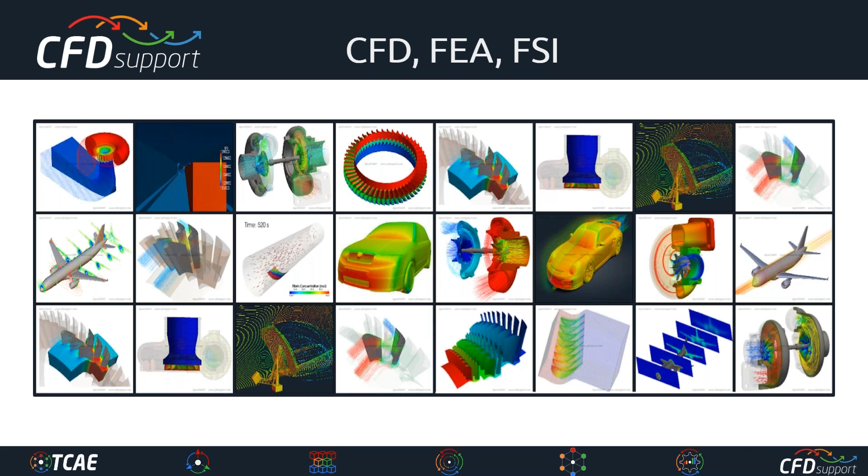Okay, so I'll start with the introduction. CFD Support is the name of our company. The company was founded in 2009 as a technological startup, and we are located in Prague, Czech Republic. Our main business is CAE analysis, simulations, specifically CFD, FEA, and FSI - all these simulations and analysis.

We have a very good, very powerful team who really know what to do, and we are developing software and doing all the stuff around it. Our main business is developing software called TCAE. It's a comprehensive simulation environment, and that's what our webinar will be about.

We have recently released the latest new version, TCAE 20.09, which was really a big shift in what we do, because it's new and there is a lot of new stuff in it.

I guess you know it, but still, TCAE is based on open source - we love open source. It consists of 46 open source packages, and a lot of time and effort has been spent on developing those packages by the open source community. On top of that, we have spent more than 30 man-years of specific development to make it available with a graphical interface, make it robust and usable, and really prove it works. So a lot of work has been spent.

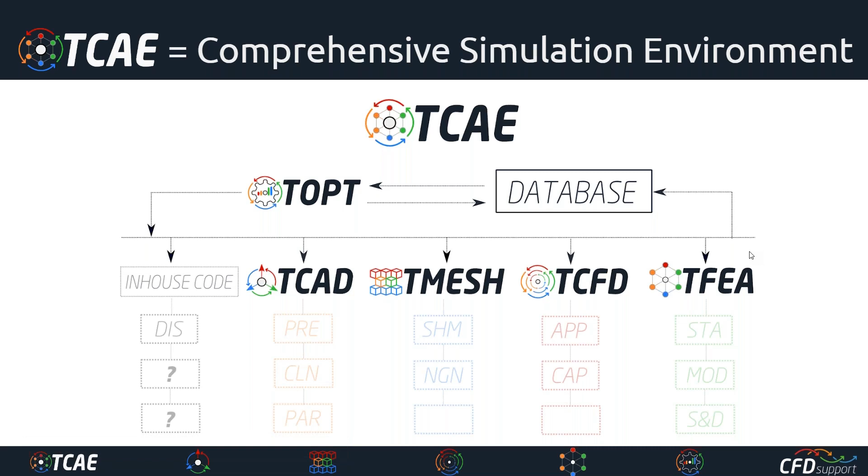TCAE is now a comprehensive simulation environment. It consists of software modules - specific software modules which are in fact standalone software pieces. So they can work either together in a connected workflow, or they can work just like standalone tools inside other workflows. It's very flexible and very much variable in terms of its use.

TCAE has strong integration ability. It was developed from the beginning in a way to fit any existing workflow which already exists. So it can replace, for example, just the CFD part, or it can do just meshing, or both of them, and it can be used in combination with all the possible software pieces available in the market - either open source, commercial codes, or in-house codes. TCAE is always here to be used inside existing workflows.

Okay, there are lots of stuff. I'm not gonna go into too much detail. It's very important that TCAE has a graphical interface, where the user can set everything from scratch, run the simulation, evaluate the results, and save them and get back anytime. So it's very comprehensive in these terms.

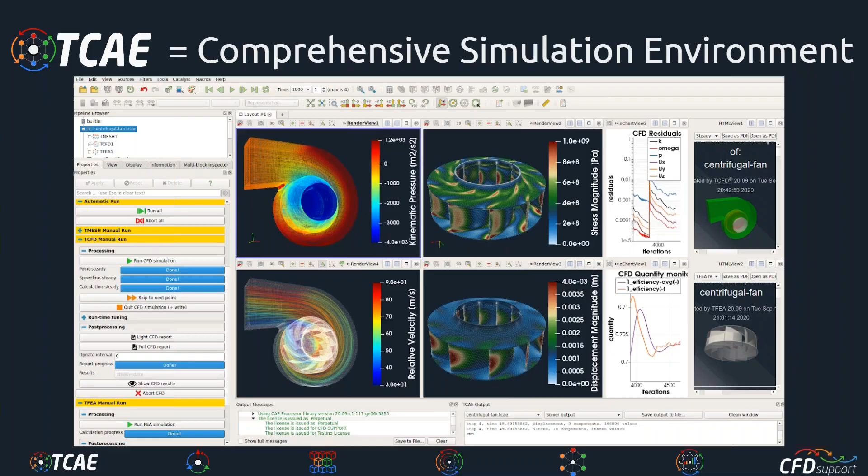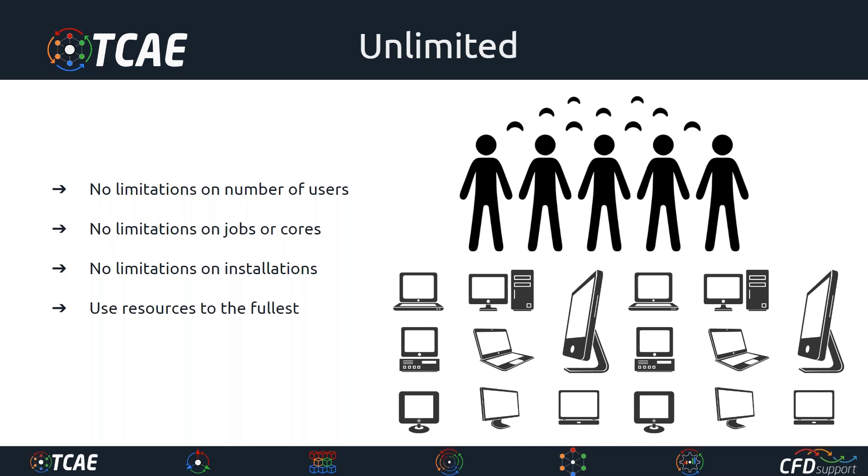TCAE is unlimited, so there is no limitation on the number of users, no limitation on the number of jobs or cores, and no limitations on hardware installations. So its users can use it to the fullest in terms of users, hardware, and everything. This is a big thing in terms of business model.

TCAE is definitely very accurate. We are clearly focused on the accuracy. I would say we are obsessed with accuracy.

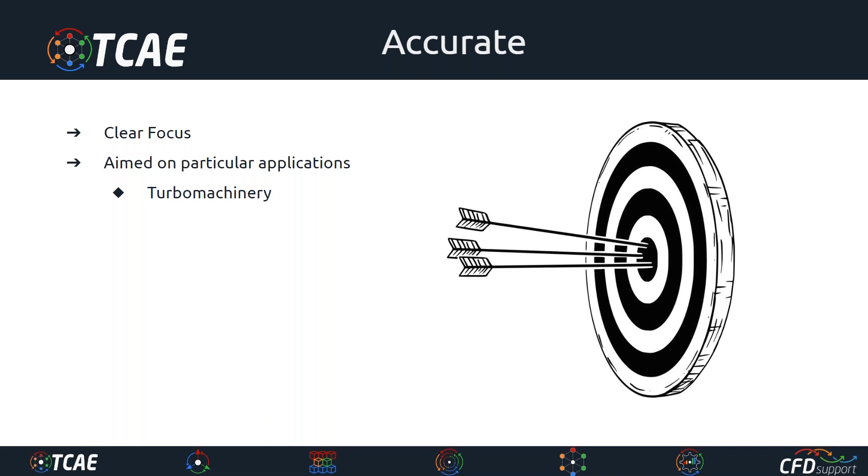TCAE is always aimed on particular applications and particular simulations. So it's not software for everything or for anything. It's software aimed especially on turbomachinery simulations like pumps, compressors, turbines, fans, and also for external aerodynamics. So it's definitely not a general purpose code, it's a specialized code for special applications.

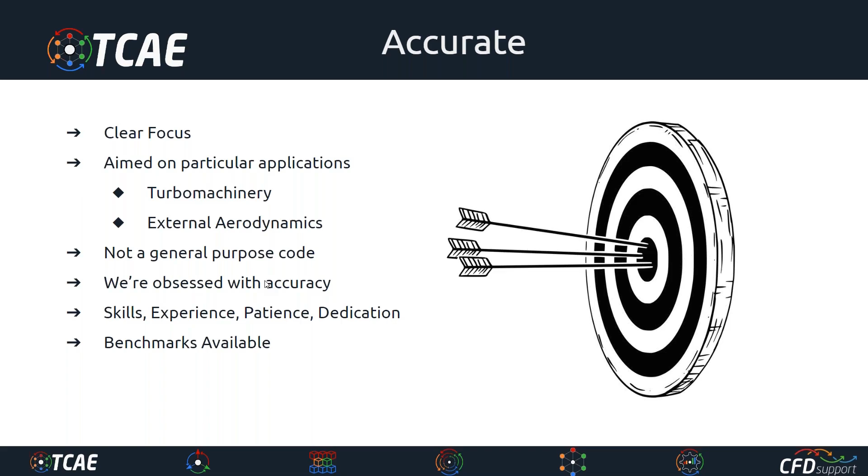Accuracy is our big goal, so we do a lot of tests, a lot of sensitivity tests and everything, so we are ready to prove it's accurate. We especially believe that any successful project in CAE and in simulation is a matter of skills, experience, patience, and dedication, and it's definitely not luck or quick actions. So it needs to be resolved to a particular quality. We do quite a lot of benchmarks, so we always measure how accurate we are, and we are ready to show it. So accuracy is our very high priority.

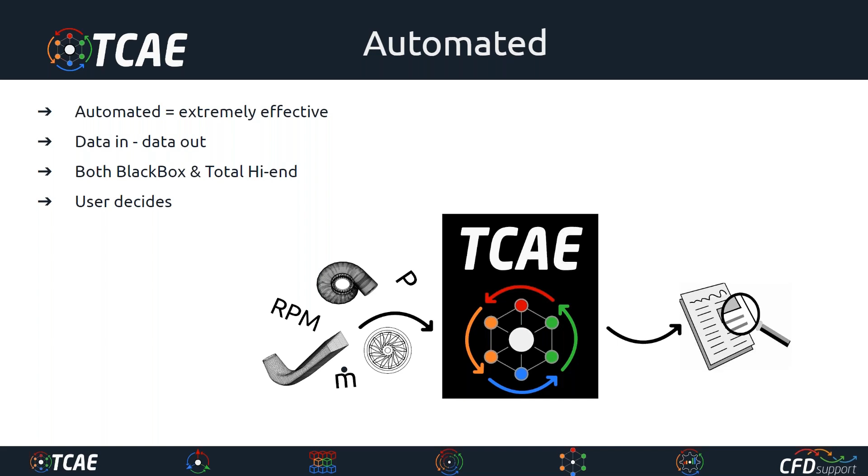TCAE is automated. It's extremely effective because it's automated. Its users can use it in a simple way - they can just put the data in, let TCAE do the simulation, and just pull the data out. So they can use it as a black box, or its users can use it as a highly sophisticated simulation code where all the options are open, even the source code of these open source tools. So it's extremely flexible, and the beauty of it is it's the user who decides how deep to dive into CFD, CAE, or FSI, or not at all - how much to deal with the details. That's the beauty of it.

We deeply believe in the importance of technical support. The technical support is coded in our company DNA, it's coded in the name of the company. So we believe technical support is extremely important, and we are kind of proud of it. We use a special system, osTicket, for treating the technical support. It's unlimited, it's very flexible, and we have a custom approach to every customer, and no one is ever left behind. We are like a family, with our clients and also our colleagues here. So I would say our company is a one-way ticket - we have never lost a customer to a competitor. Once someone starts collaborating with us, he stays.

Our software is especially developed for Windows and Linux. We have two branches where the workflow is exactly the same - native compilations, and also remote desktop into the graphical interface is possible, as well as batch mode. So it's very powerful in these terms.

The meshing system is either automated - TCAE is ready for automated meshing either on the CFD side or FEA side - or external meshes can be loaded into the system. So it's always up to the user. We always leave the decision about the mesh up to the user. Some users prefer automated meshing, some prefer their own meshes for historical reasons or specific know-how. So we always leave the meshing decision up to the user.

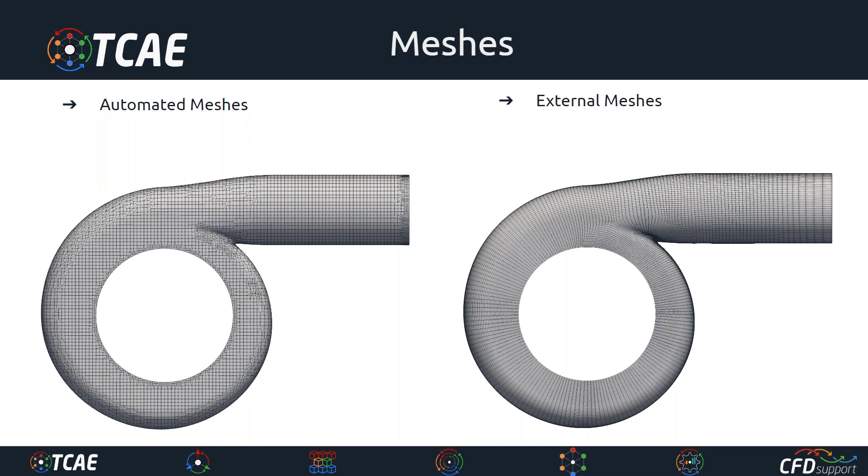That's quite important. TCAE has a very robust and detailed post-processing system. Every simulation, either CFD or FEA, has its own HTML or PDF report. So anything which is run is also evaluated in an automated system.

The visual results can be post-processed in ParaView. ParaView is an extremely powerful post-processing tool, and all the integral results are written down into tabulated CSV files.

We have implemented special post-processing tools like meridional average or blade-to-blade view directly into ParaView. So there's turbo post-processing, and all the reports are available in HTML and PDF automatically, which is very useful. I would say this post-processing and reporting system is one of the best we offer.

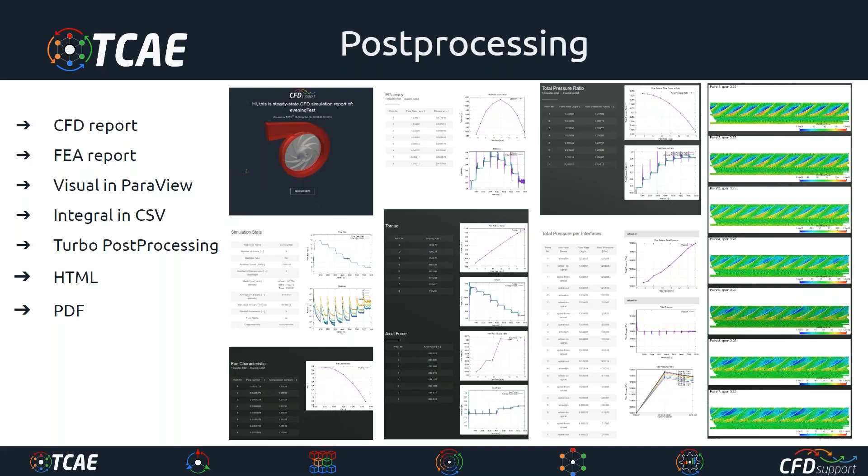TCAE is continually developed. Every day we write down new items on our to-do list, and also finish some older items. We gather the requirements from our users, create pools of them, and put them into new version releases.

The development is definitely open-ended. What I know for sure is we will always keep developing, because it's our passion. We always innovate, and we will always keep adding new features and new plugins.

We call it horizontal development, where we are adding new simulation plugins, new simulation tools, and adding complexity and multi-physics.

And in the vertical development, we are adding new applications, new capabilities, and high-tech methods inside those verticals. I can promise we will keep developing, because we believe in innovation, and that there's a lot that can still be implemented to move the business and the field upwards.

Okay, there are a lot of application examples. I'll be reasonably quick here.

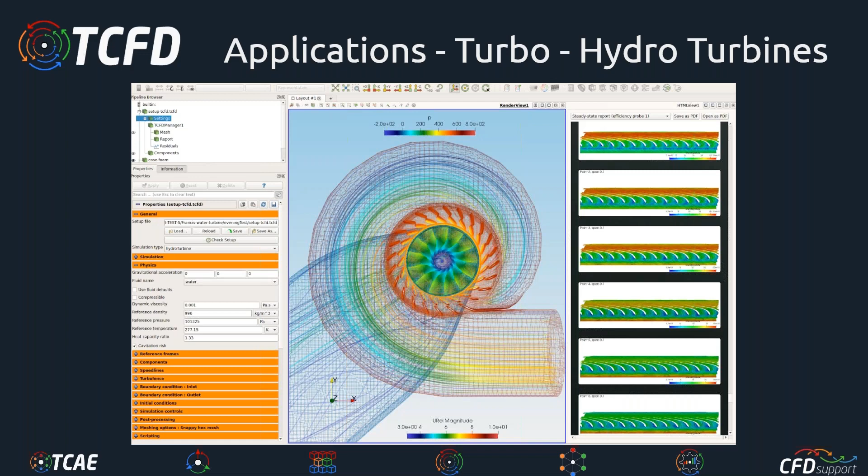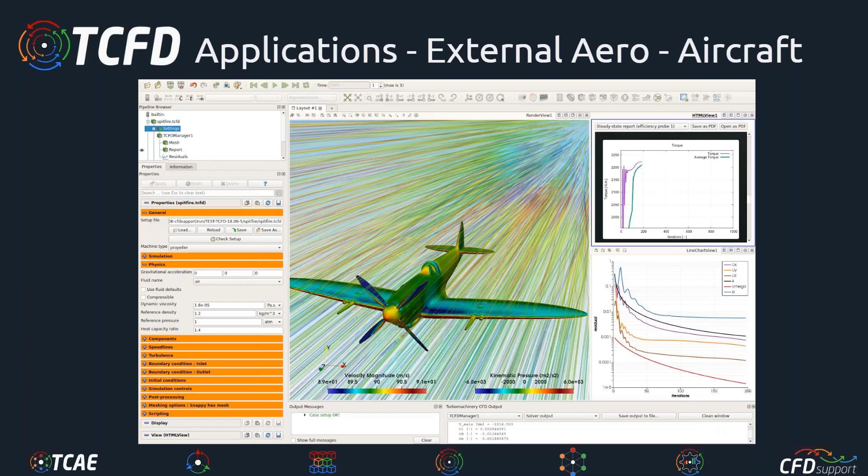TCAE, formerly named TCFD, has always been best on turbomachinery simulations, like pumps, fans, hydro turbines, compressors, turbochargers, and wind turbines. Later, what had worked so well in turbomachinery, we extended to external aerodynamics like car bodies or aircraft, valves and hydraulic valves, various manifolds, exhaust manifolds, intake manifolds, and combinations of turbomachinery and external aerodynamics like propellers and ship hydrodynamics, drone propellers, and building wind load and comfort.

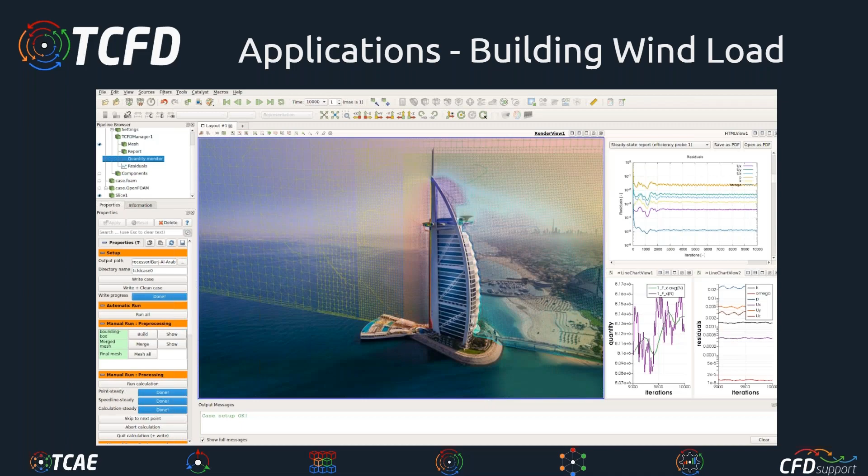We've always put a lot of emphasis on benchmarking, so we did a lot of benchmarks for almost all of our clients. Of course, there's always a problem with confidentiality of the data, so only some data we were allowed to make available.

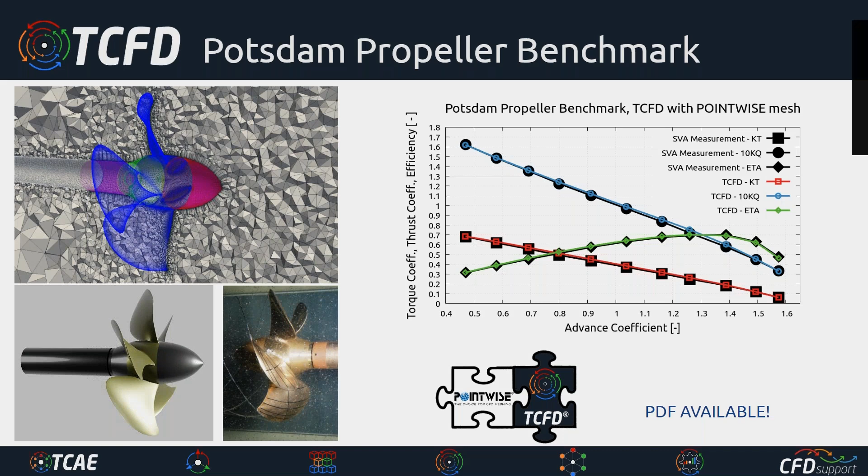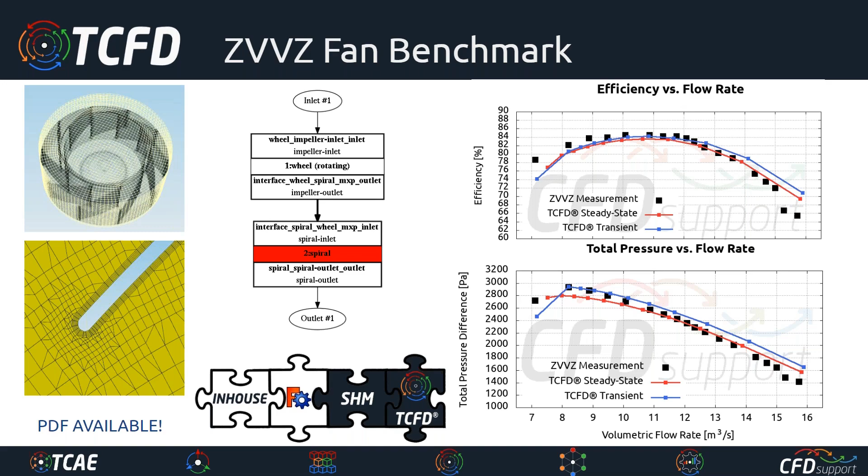So there are a couple of benchmarks we did. I'll be reasonably quick here. We did the Potsdam propeller and Francis turbine, for example, centrifugal fan and compressor, a parallel scaling study, and also the aircraft.

We did a couple of optimization studies and very advanced meshing systems, and this is today's case. I'll stop here for a while.

This is what's on the table, what we did, because TCAE is quite new software. We decided to create a benchmark which is an FSI benchmark involving fluid flow. We created a case we call beam-ball, because there's a beam.

And a sphere at its end, and this beam-ball is exposed to the airflow flowing on it, and the forces acting on the sphere act on the beam. We can run this in TCAE as a complete simulation.

The beauty of this beam-ball benchmark is that the analytical solution can be evaluated analytically, so we know what the results should be and can write it down on paper. The analysis has been done publicly and is on our website and in PDF, so it's completely available. You can go there, download it, and check if we did it correctly.

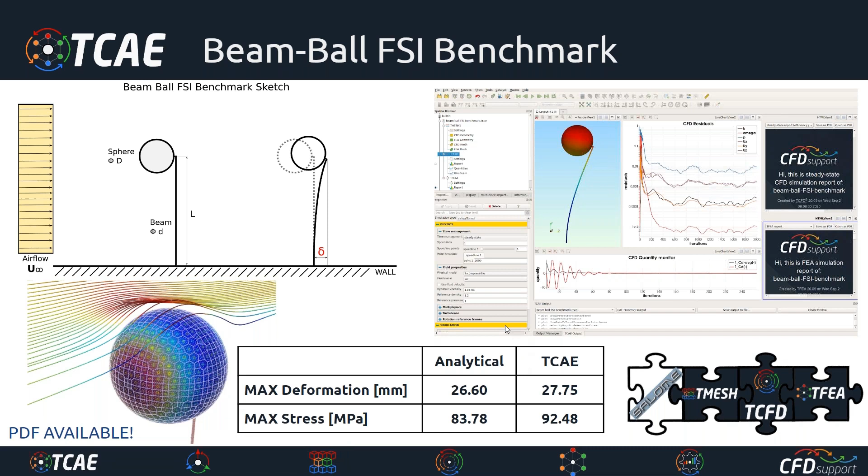Now I think it's time to hand over the presentation to Radek. So let's check him out. Radek, are you still alive?

Hello, Luboš. Yes, I'm still alive. This COVID situation is pretty serious, right? In Czech Republic. So, always ask when I can see you. Should share your screen. Can you see my screen? Stage is yours. Yes, we can see it. Great.

Okay, thank you, Luboš, for your amazing introduction and first part of the presentation. Now I'm going to the second part of this webinar, which will be a little bit training, because I will show you how to set up this particular case of the ball beam benchmark from the very beginning.

So to do so, I will simply open the TCAE software. This is how it looks in the graphical user interface. As Luboš already mentioned, the graphical user interface is implemented in ParaView, which is an amazing tool for visualization of the data. We have incorporated into this tool many options for how to set up, process, and post-process the simulation. So you can use both TCAE features and ParaView features. Everything can be done within one graphical user interface.

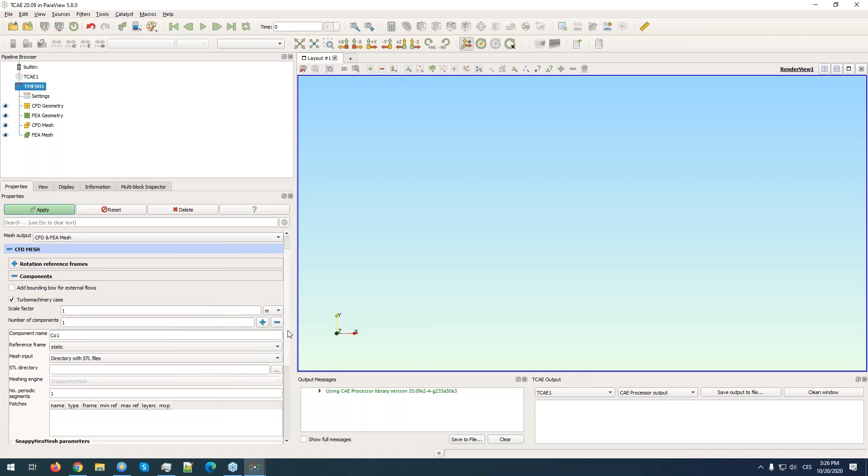There are several menus. Here are some rotational reference frames which are applicable for turbo machinery cases. This is not a turbo machinery case, so I don't need to bother with this menu. The components menu is the most important part because here we load either the external mesh if it's ready, which is not this case, or the input geometry. The input geometry has to be exported from any CAD-like software in the STL format.

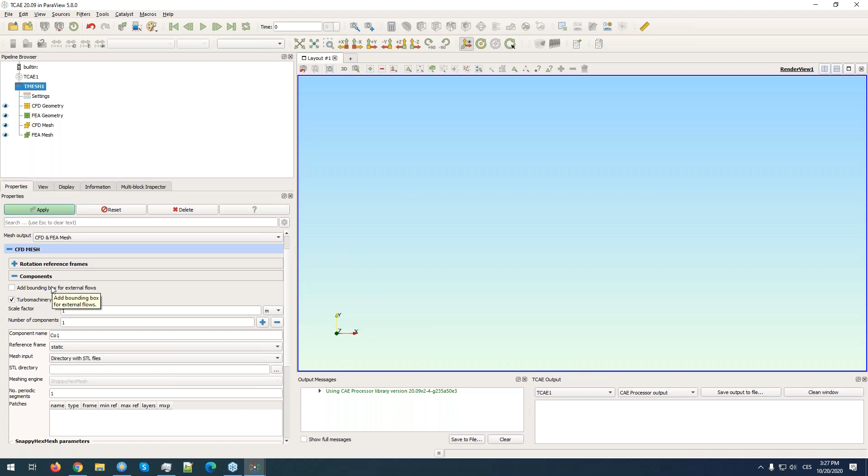So because we are going to do the ball, we are doing the external aerodynamics of the ball, so we have to create some virtual tunnel geometry, which we can do implicitly by checking the bounding box for external flow option. If I check it, then some virtual tunnel will appear in my render view.

The turbo machinery case option is not relevant here, because it just enables additional options in the meshing which are tailored just for turbo machinery cases. So I will uncheck this option.

Scale factor just tells the software what are the source units of the STL geometry. My units are meters, but some CAD can export inches or millimeters, so then you just need to switch to the source units of the STL.

Number of components: usually for turbo machinery we can have stator, rotor, additional stators, and so on, multi-stage machines. We can add more components to connect them and, for example, set what is rotating and what is not. But we have now just one region, one component, which defines the whole virtual tunnel geometry. Reference frame is static, nothing is rotating, so the default is fine.

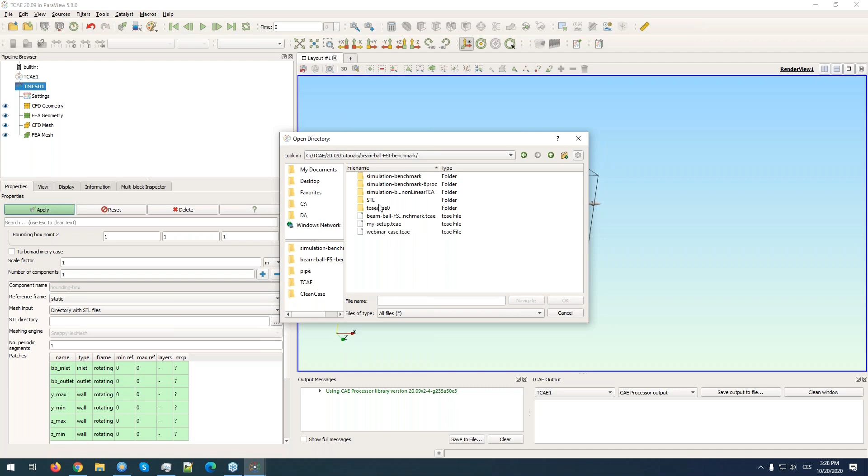We will be using the directory with STLs. So I will locate the directory with my source STL file, the source geometry. I will go to TCAE here in tutorials, beam-ball FSI benchmark, and check this STL in which the input geometry is stored.

Okay, then you can see the name of the STLs appear here. The ball is used for the CFD simulation, and beam-ball solid is the geometry for the solid for FSI analysis. So I will load this ball geometry.

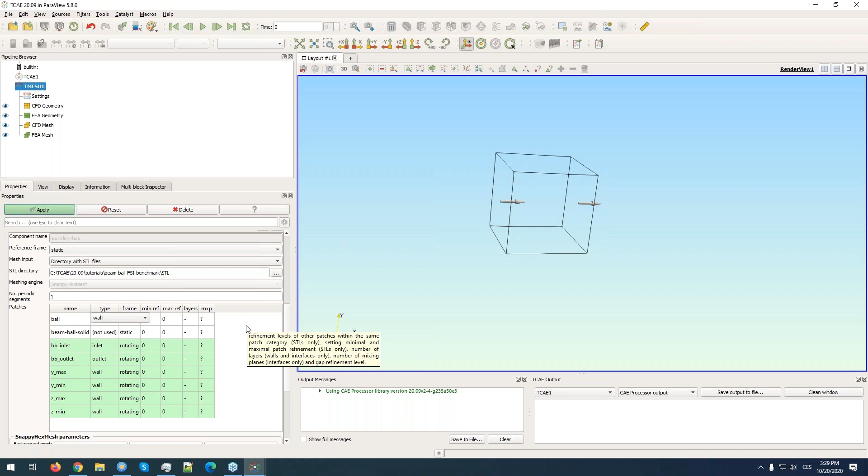So we'll assign a type of boundary in the CFD world. There is a most general type, which is wall, a rigid wall, which somehow describes the rigid wall of any geometry. So I will apply it. Then we can see that this ball will appear in the render view.

Now I need to create better dimensions of the virtual tunnel with respect to my ball, without the beam, because now we are setting up for CFD simulation. The forces or pressure will be the result of the CFD simulation, and these results will be taken to map on the FE mesh, and this will basically be the FSI connection. Then we will do the finite element analysis on another mesh, of course.

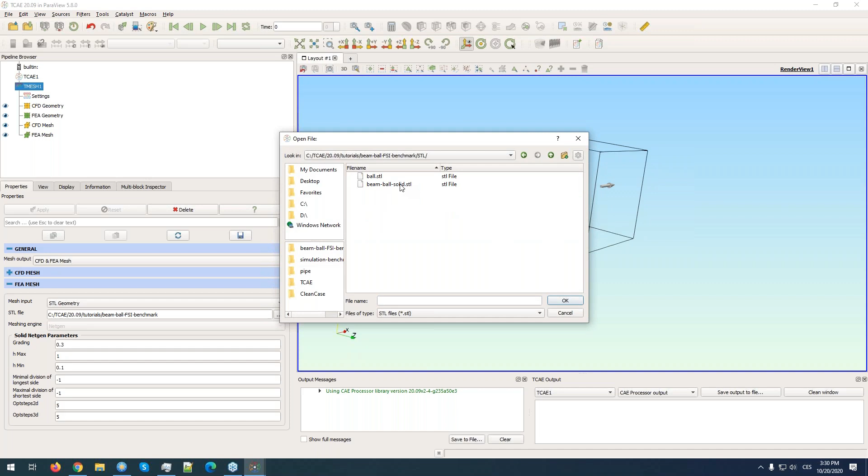So for the bounding box, let me set the proper dimensions. I'm not sure now what is the topology, so let me load also the FE input geometry. STL file is solid. I will click apply, so now I see also the solid geometry.

So I know that the flow goes in the Y direction. I will adjust the virtual tunnel with respect to the setup of the input geometry. Let me go back and set it.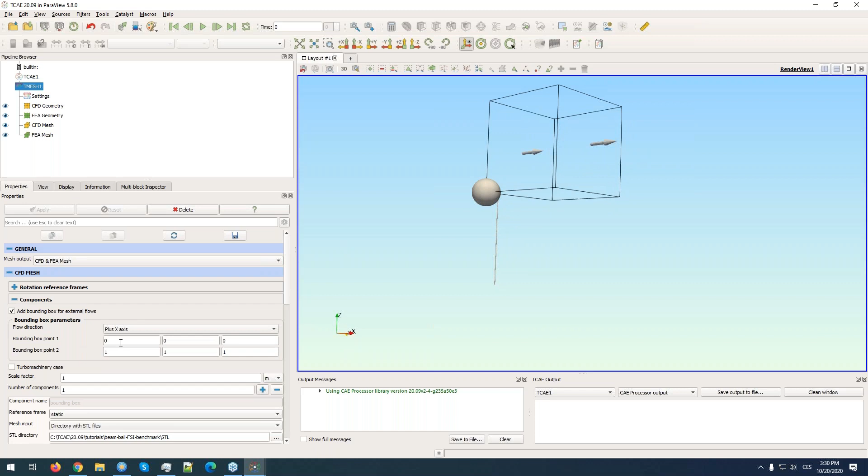So X is the width of the virtual tunnel. We can say 8 meters in width. The dimension should be large enough, because we would like to get rid of the boundary effects of the domain, so we should set it large enough.

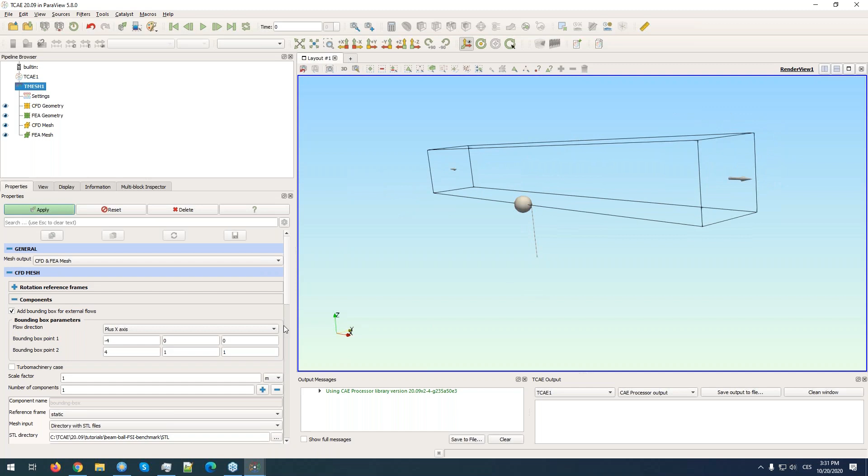The Y is the length. Let's say 5 meters before the ball and 15 meters behind, because there is the wake area, so we have to set it large enough. The same with the height of the virtual tunnel, I will set it in the same way as the width.

So this will be our virtual tunnel, and the direction of the flow is in the Y direction, so we can set it here. Plus Y, and this is our virtual tunnel setup or topology.

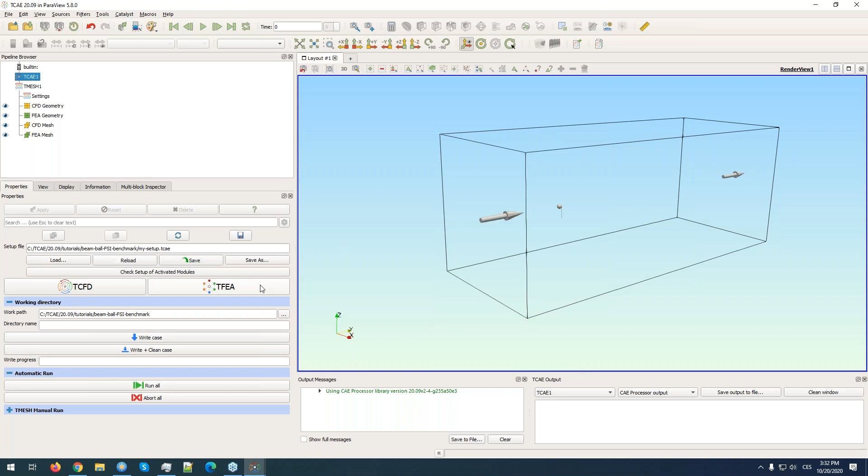Anytime during the setup phase, when you are setting the parameters, it's sometimes good to save the current setup, because if anything happens, or if you do something wrong, you can anytime reload your saved state. So I would like to save it now, to be sure I do not lose anything if something happens.

Okay, now about the mesh parameters. So this is the input topology and input data, and now I need to set up the mesh. The meshing tool is the SnappyHexMesh.

For those who are familiar with this tool, you know how it works. It always works with a so-called background mesh, which consists of hexahedras of a fixed size, and the size is set here in this background mesh size. We would like to set something large enough, because we don't care about the cell size apart from our object.

Let's say I think the diameter is 30 centimeters, so let me set the background mesh size to, I don't know, 20 centimeters. This will be the largest cell in the domain. You can imagine that everywhere in the virtual tunnel there is a mesh made of hexahedras, basically boxes, of size 20 centimeters.

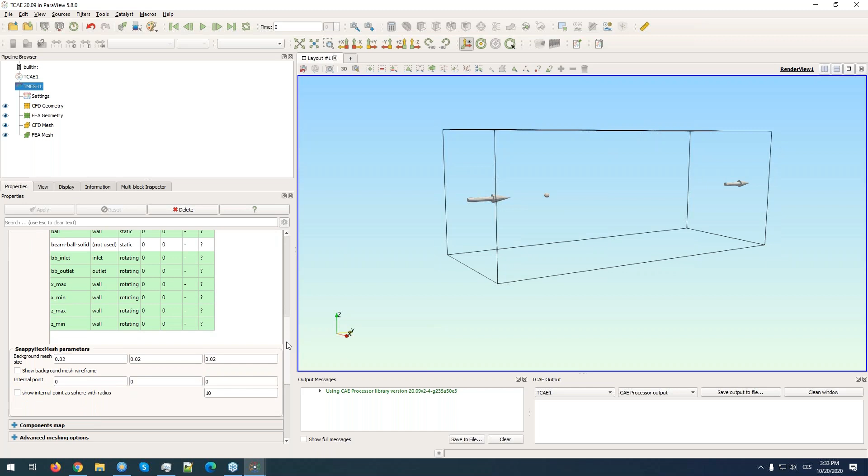Then you have to also define, because you have two options. You can mesh the ball from inside or from outside. We would like to mesh it from outside. So for this purpose, we have to set the internal point, which will define the domain that will be meshed.

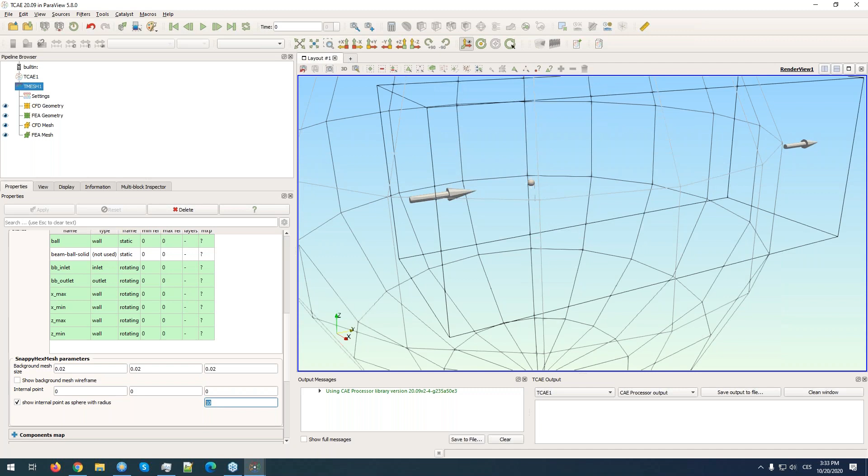This is just a helpful diameter of this virtual sphere, just to better follow the point. So I will increase it. The default value is inside, but we would like to have it outside. So any point outside the ball and inside the virtual tunnel is okay. I will use this one.

This is okay, and now we would like to mesh the ball. We would like to have the mesh finer among the ball and coarser apart from the ball. So one of the parameters which defines the refinement of the mesh at the ball, or at the object, in the table, is these two columns.

Let's say I don't want to have a very fine mesh, because I would like to run everything in short runtime, and I don't want to wait for the results for dozens of minutes. So I will do the mesh pretty rough, just for this training purpose. I will use level 4. It means the cells near the ball will be refined 4 times, and refinement means that every cell will be split 4 times. One splitting creates 8 new boxes, right? So this will be done 4 times.

Just to imagine how the mesh will look like in this position, we can try to generate the mesh and see what we have set. Let me go back. If you go to the first item in the pipeline, I will save, and now we can run the meshing.

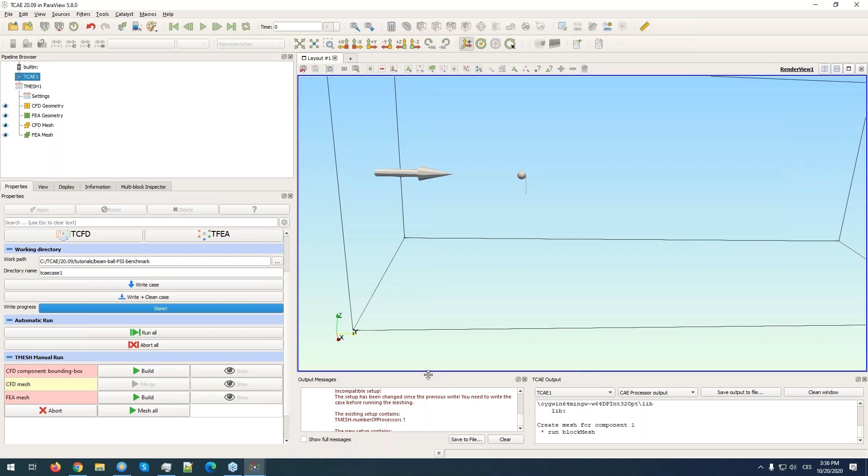Now if I run it, it will tell me that I have something changed. Yeah, I changed the processor number, which you can see here, from 1 to 10, but I didn't click write case. So I need to first click write case to write the new parameter, 10 processors, and now I can click build the mesh, and now it is running in parallel on 10 processors.

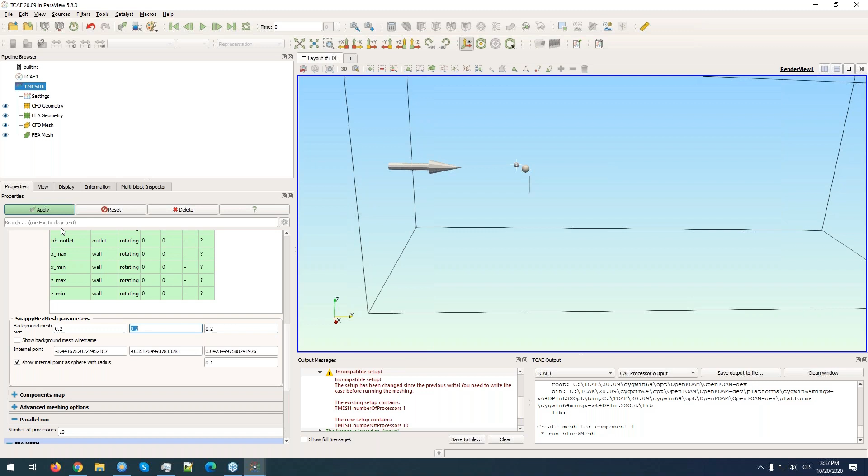Right, but maybe, okay, I see I made another mistake, because just imagine the size dimension of the virtual box — I told it 2 centimeters and not 20 centimeters, so the mesh would be extremely large. So you can see it was my first misprint. This will be much coarser — sorry, coarser, but better for the meshing speed.

So again, write and build the mesh. Now you can see the log. This is basically the output log of the TCAE software, or you can go also for the output of the SnappyHexMesh tool. Some of you, if you know SnappyHexMesh and OpenFOAM, can see the output log from SnappyHexMesh.

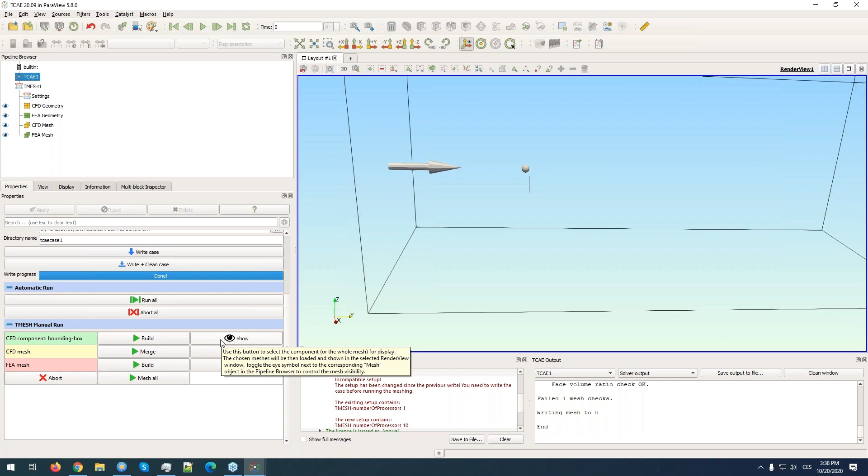Whenever the meshing is ready, we can click the show button. Here are the items which are visualizing each component. I would like to now visualize just the CFD mesh, so I can click this item, CFD mesh. I can choose, for example, surface with edges, and to see what is happening inside, I can make a slice here, slice button, slice.

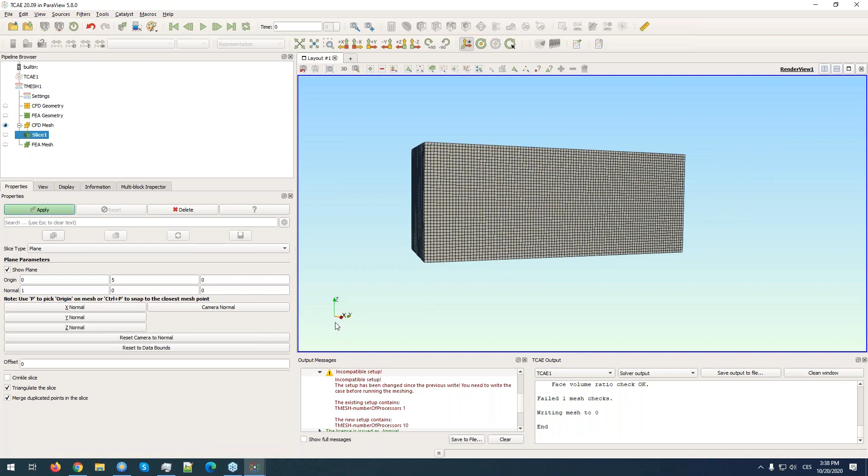The normal will be the X axis, yes. And in the middle, I think is the default. Perfect, and this is my — sorry — surface with edges. So this is my current setup.

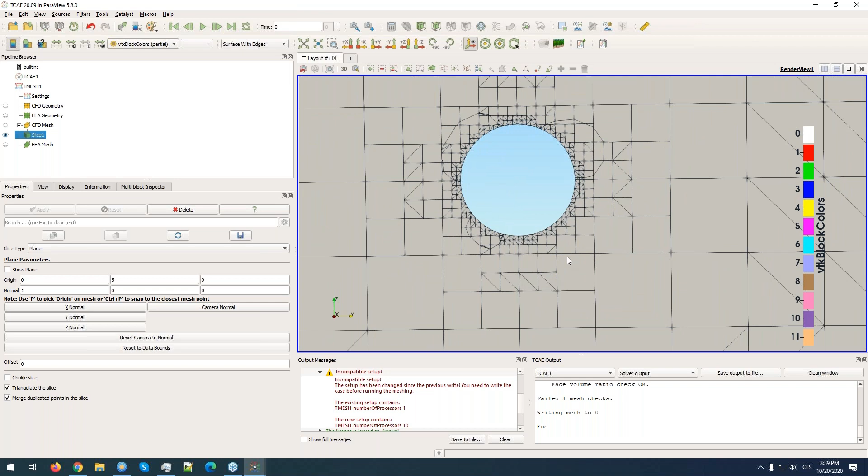Okay, so let's say I'm satisfied with the refinement on the ball, but I'm not satisfied with the refinement near behind the ball and among the ball. So I can go back to the TMESH and play with it.

Okay, so what I noticed now is that by default, maybe because I checked off turbo machinery after adding the box, the default frame is rotating. So I will just switch everything to static, because there is no rotating component, of course.

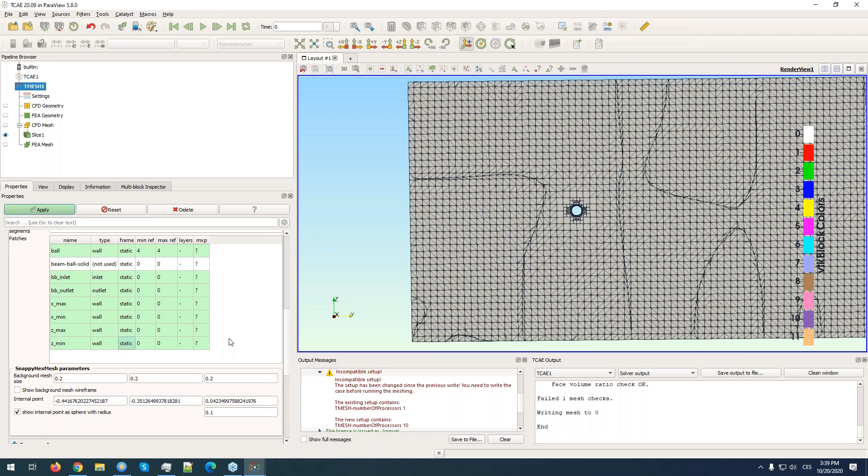And for example, what I can do with the type - I can simulate a virtual tunnel built from rigid walls, but I would like to simulate that the ball is levitating in the air. So I don't want to model the walls of the virtual tunnel like rigid walls.

So I can switch, for example, to symmetry, which is a geometrical property - like there was a symmetry, as if you copy the virtual tunnel everywhere. So this will mimic this symmetry type.

Okay, and I would like to refine the mesh along the ball. So I can do it very simply - I can enable the advanced properties here, and if I click it, new options will appear, including add refinement regions.

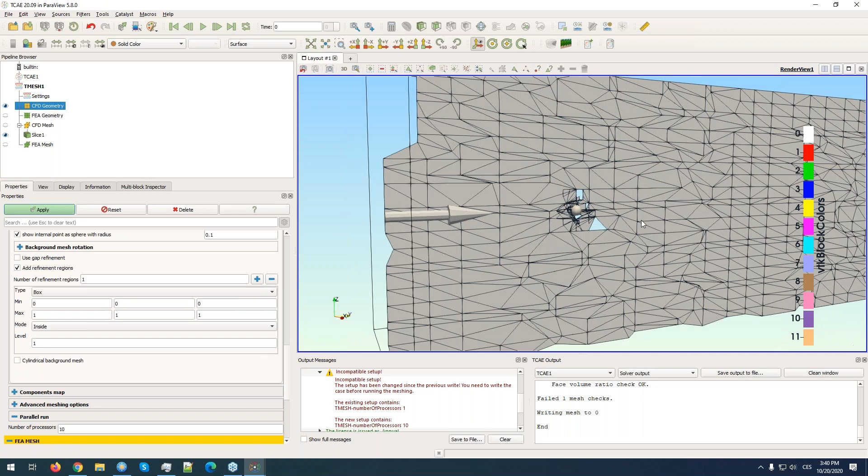Let's say, for example, we usually want some refinement among the ball and refinement in the wake area behind the ball. There are some implicit regions we can use for this volumetric meshing. So let's say I will use some cylinders behind the ball - I'll click cylinder, region 1, and set some rough refinement in the wake area.

So let me set the cylinder in the Y direction. The first point is 0, 0, 0, because the ball is placed at the origin. So I will make a 5-meter long cylinder with a radius a little bit higher than the radius of the ball, which is 30 centimeters I think. So I will go for, for example, 0.5.

Okay, mode inside, and level - let's say level 0 is this. So I would like to have 2 times refined mesh in the wake area in the big cylinder.

Then I can create another region, again with a cylindrical shape, but a little bit shorter - let's say 2 meters, with a radius a little bit lower than the previous one, and an even higher level of refinement.

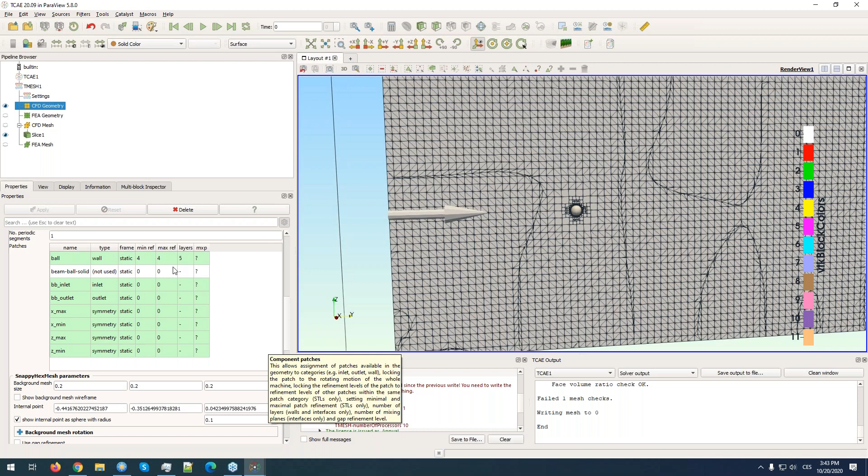Okay, and maybe the last thing - because for external aerodynamics and general CFD applications, the boundary layers are important to properly model. So for example, I will add 5 layers at the ball, and here in the advanced meshing option, in the layer mesh parameters, I would like to enable adding the layers, and here are some parameters.

First, final layer - so final layer thickness would be, I don't know, I have 5 layers, so let's say 0.4, which is the parameter that is the size relative to the cell size near the wall. So it is a relative size.

Okay, so let me check what we have set, so we can quickly remesh using the updated setup. We added refinement regions, and we also added the boundary layers.

So just to see if we have a proper mesh for the CFD analysis - usually this is standard work. You iterate to get the desired mesh, and when you are satisfied, then you can move to set up the CFD simulation itself.

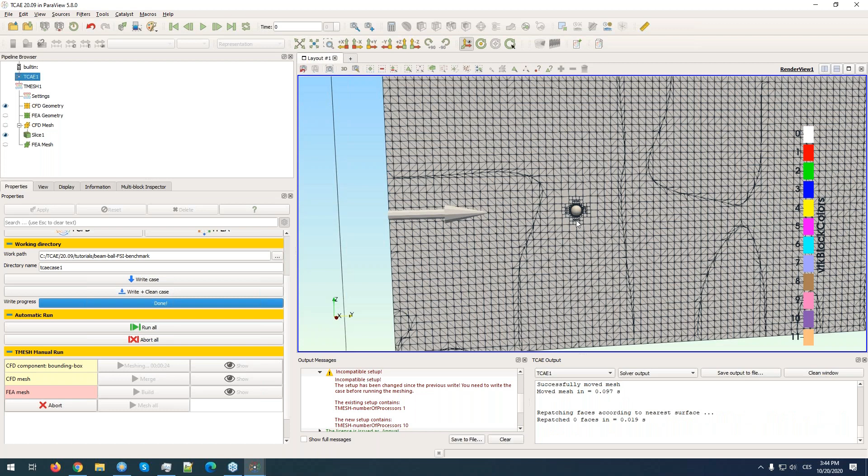So I think we are almost at the end. Yeah, now the mesh is almost ready, so I can click show the mesh.

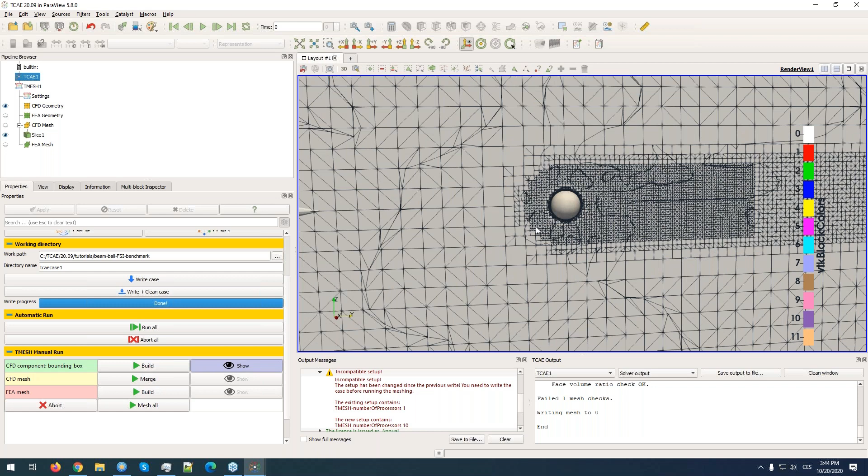Perfect, and we can see that we have nice refinement around the ball and behind the ball, gradually refined from finer mesh to coarser mesh to the coarsest mesh. So this could be a typical mesh for external aerodynamics, and we have also 5 layers here, which looks very nice. Okay, so this could be our CFD mesh.

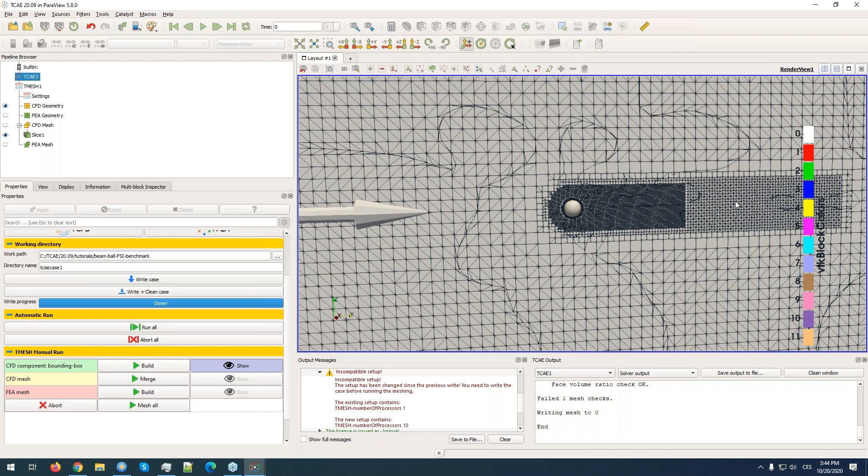So now the second part is the mesh for the finite element analysis. It's much easier because it includes just a few parameters. So let me go for the T-mesh and for the FEA part.

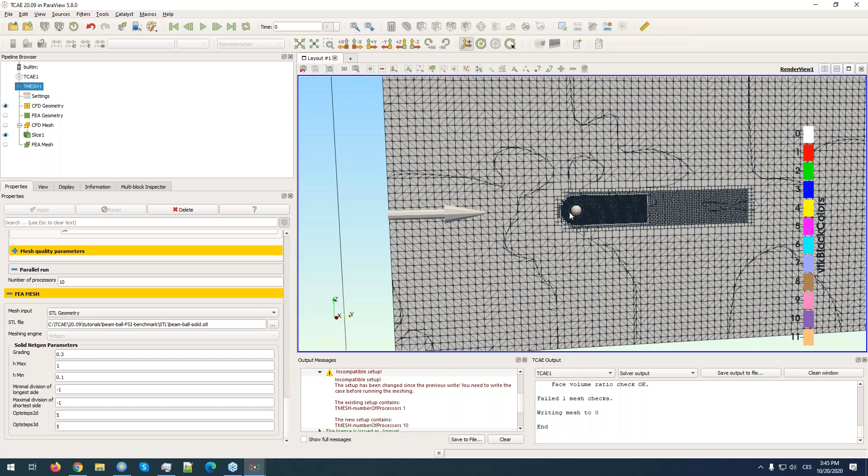Okay, so the STL is already loaded. This is the input STL. Let me get rid of it, and I will get rid of this point. Maybe show the internal point as a sphere, and I'd like to see the FEA geometry, not the FEA mesh.

So this is our input geometry, and here are just a few parameters for the NetGen mesh generator - the sizing of the tetrahedra, maximum and minimum. I think the thickness of the beam is something like 1 centimeter, so I will set some rough mesh again for a quick simulation. Let's say 4 millimeters is the maximum size, and 2 millimeters is the minimum size.

An important parameter is the optimization step for the 2D and 3D meshing in NetGen. Usually a higher number generates higher quality mesh. Let's say 15 for 2D, for the surface meshing, and then for the 3D meshing we'll use a higher number of steps. Something like this could be fine.

So as you've just seen, it's much easier to preset the FEA mesh parameters. Let me try to generate the mesh quickly.

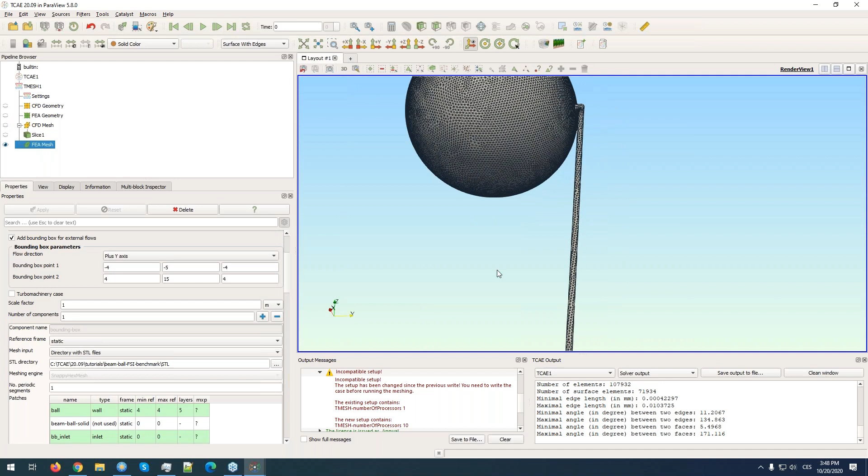So I can click show and visualize the FEA mesh. This is the resulting FEA mesh. So you can see, you can check it here.

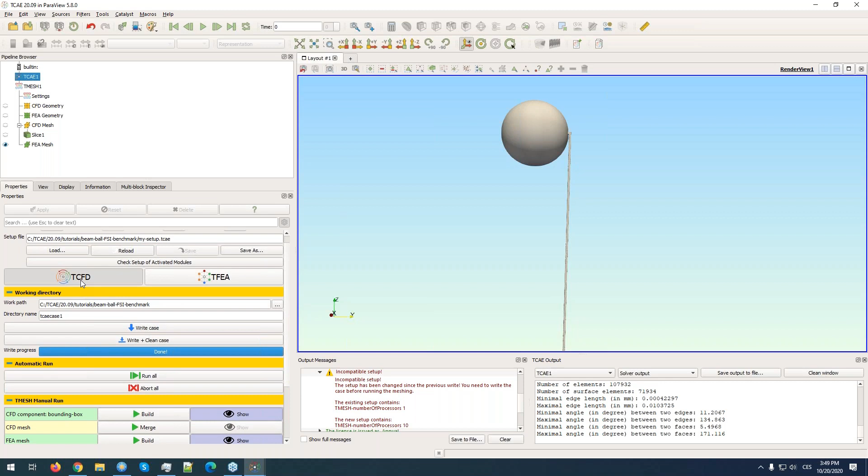Okay, so we can move to the CFD and FEA analysis setup. Let me save it, and now I can enable the modules for the CFD and FEA simulation. Let me enable both of them. A new window appears here, used for runtime visualization of the results or intermediate results during the simulation. And two new items appear in the pipeline browser: TCFD for CFD setup and TFEA for FEA setup.

Let's go for the physics. Here you can set if you'd like to use steady state or transient simulation. Speed lines are for turbo machinery, for compressors for example. Speed line points - you can define as many points as you want to generate different scenarios, different physical or boundary conditions for your simulation. But here we just need 1 point, to simulate at a given speed.

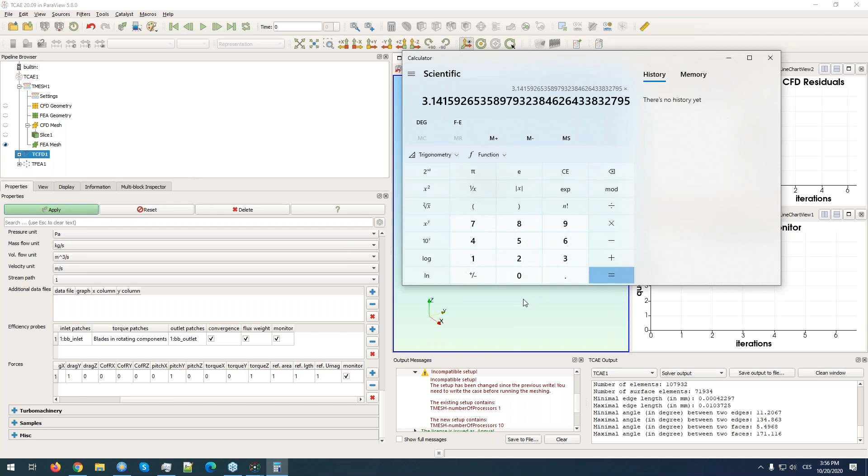The reference area is the reference area of the ball, so let me quickly calculate it. It's pi times the radius, which is 0.15, squared. Okay, so this is my reference area. Reference length is the diameter, let's say, and reference velocity is 30 meters per second.

Okay, so let me stick with this setup. I think I have set everything. We will see during the simulation if I set everything in the right way. Let's go for the save, and the last quick setup for the FSI analysis. Let me show you what can be done here.

We would like to map the results from the CFD to the FEA analysis. This is under the fluid structure interaction checkbox. The source is the CFD results. The patch which I would like to map is the ball, of course. I don't want to rotate the ball because I have no rotation included in the CFD simulation.

I would like to map the forces from the pressure, so it will automatically compute the forces from the pressure and map them on the FEA mesh, and use relative pressure for computing forces. You can use either relative pressure compared to ambient, or absolute.

For some applications it is important to use relative pressure, for example because you don't have the whole object within your simulation. So usually the safest option is the relative pressure, because you would like to have just the deformation, the displacement of the stick or the beam.

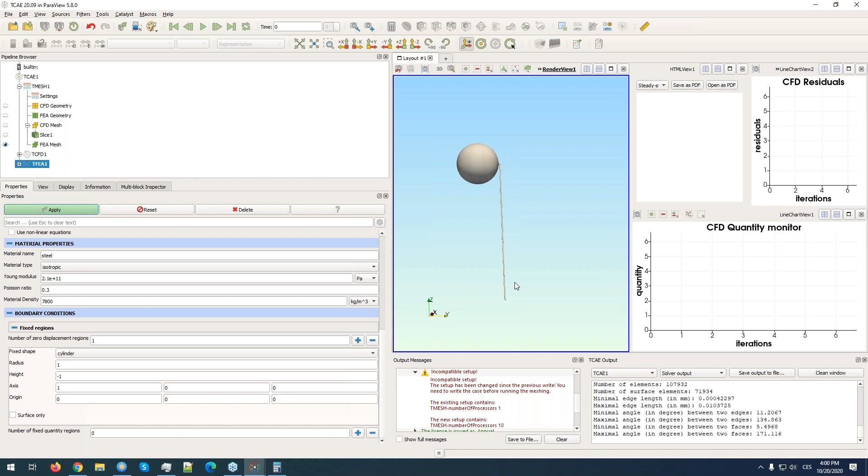The last thing we have to define is the kind of boundary condition. We have to define which part will be stuck to the ground, or which part will be fixed, so no deformation will occur there. We can fix this region to define the condition of the simulation.

This can be done by defining a region, using a box in 3D. Let me read the position of the bottom of the beam - we are in the Z direction, so minus 1 meter is the bottom of the beam. Let me define a rectangle, with minimum and maximum some high values, but for the Z direction I would like to stick somewhere here.

Let's say 5 millimeters above the lowest part of the beam. You can define if you would like to fix only the surface points, or all the points within the volume defined by this box. I think I can stick with this.

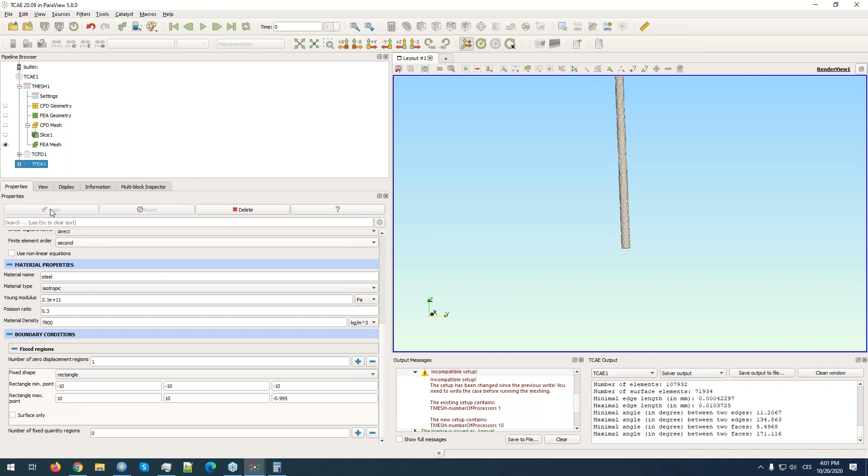Okay, so fingers crossed. You can use the check setup to verify everything is set up properly, if something is missing. If you click it, okay, the first positive message here - case setup is okay. Now I need to write the case to save all my changes.

Okay, perfect. Now, because I changed something in the CFD mesh, some final operation has to be redone - not the whole meshing, but basically all these boxes must turn green. So I will just click merge, which applies some small modifications to the mesh, and now we can run the CFD and FEA simulation. You can run everything from the very beginning, and it will all run automatically.

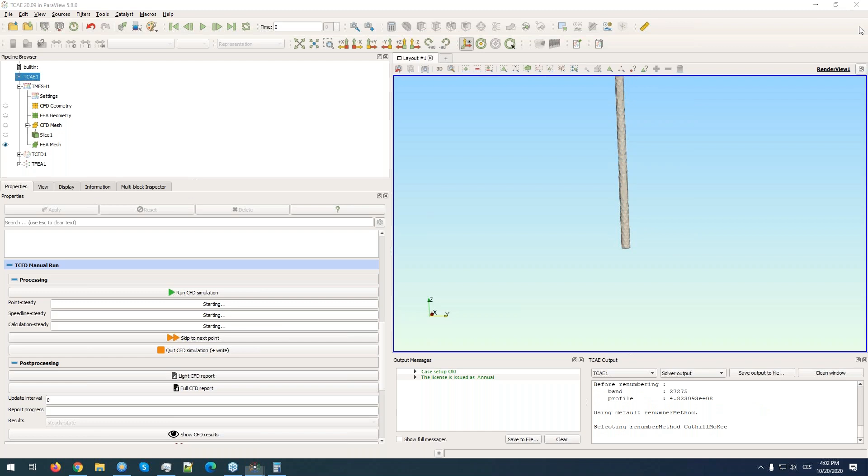So all the steps will be done without any interaction. Now because I already have the mesh generated, I will go step by step, and now I will run the CFD simulation. You can follow along anytime. Let's enlarge these windows.

Here are the quantity monitors and the residual monitors of the simulation. In the quantity monitors, you can switch to any quantities at any time. If you click on the CFD quantity monitor in TCFD, there's an item called quantities, and if you click the display bar, you can choose any quantity that's being evaluated.

Let me check, let's go for lift and drag coefficients for example. There's always the instant value and the average value, which is averaged over the last window, that was 200 iterations. You can zoom out or zoom in anytime, or I prefer this approach.

If you click View and then Left Axis Custom Range, since the CD values are small, let me change the range from minus 0.1 to 0.5. Now you can nicely follow the CD and CL quantities.

But you can also reset it to automatically appear, so it's automatically adjusted. Okay, this is the best setting.

All right, so the CFD simulation is running. You can follow the quantities and get a sense of the simulation's progress. The time left is 2 minutes now.

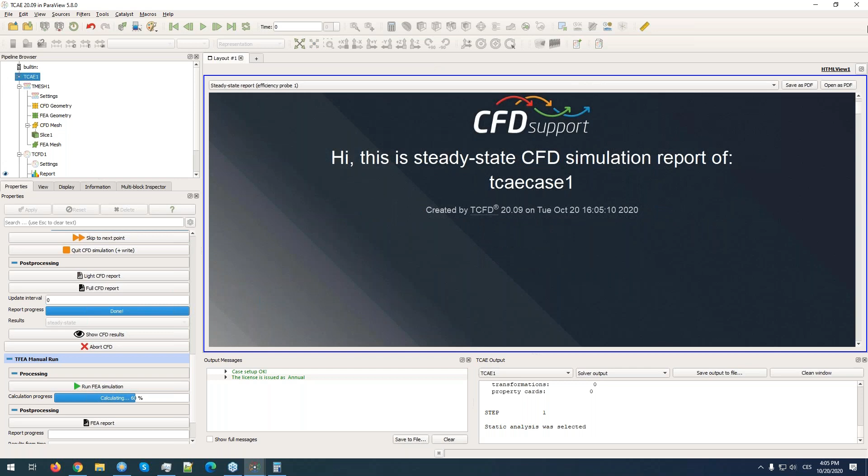So now it's generating, and at the end we'll see the report in the HTML view. Meanwhile the FEA analysis is calculating. So for now, yes, it was correct.

So here we have the results of the CFD simulation: the residuals, some statistics of the mesh, of the simulation time, and other parameters. Here we can read the force coefficients and the convergence process.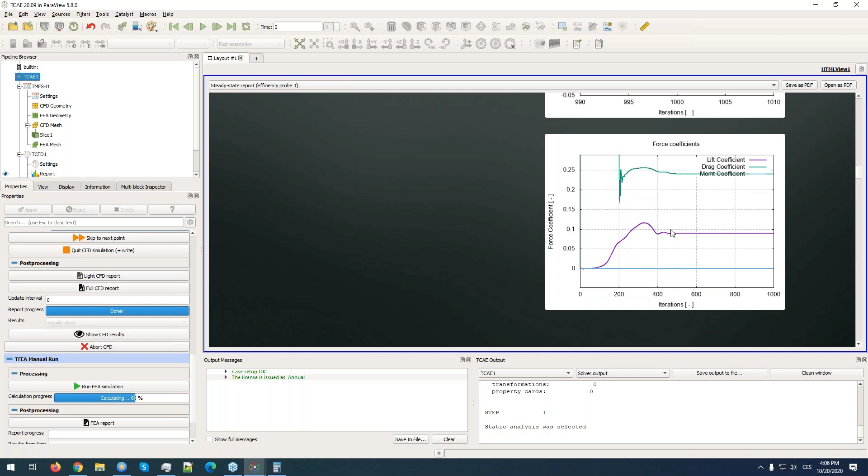As you can see, this straight line shows where I clicked the skip point, basically the end of the simulation. You can follow all the parameters that are interesting for you, all at one place. This is the report view.

You can visualize the results anytime, so I can click show results. Let me get rid of the input or this FEA mesh, and now I can click show the CFD results.

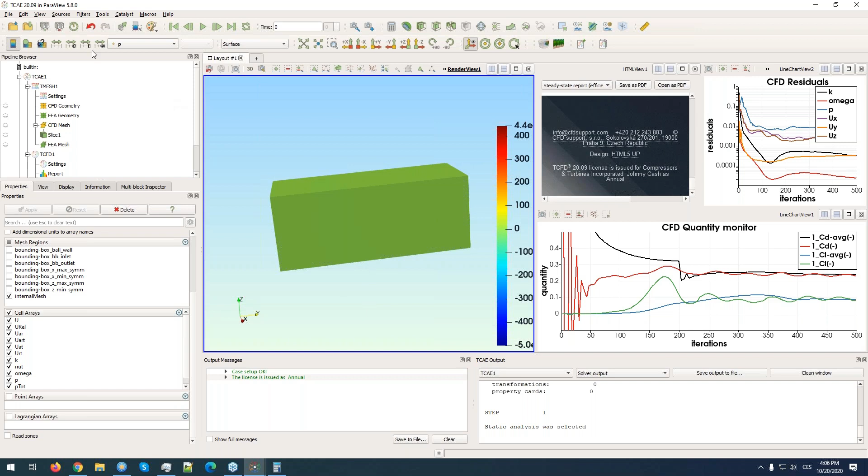So this is the domain. Maybe I can make a slice in the middle, and I can visualize the velocity contour. This is the result of the CFD simulation, and the pressure on the surface, which I can visualize here.

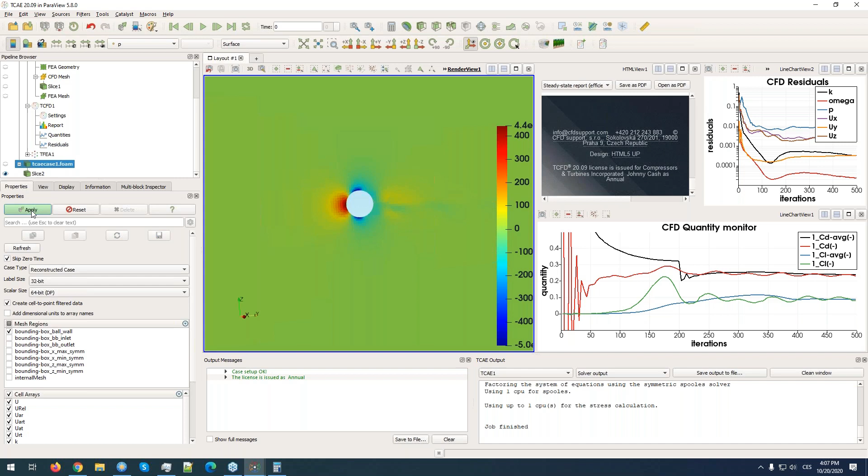So this item holds the data, and I can visualize just the ball, get rid of the slice, zoom in, and yes, this is the pressure distribution on the ball.

Meanwhile, I think the FEA analysis is also finished, so I can generate the FEA analysis report and visualize the FEA results. Let me apply it.

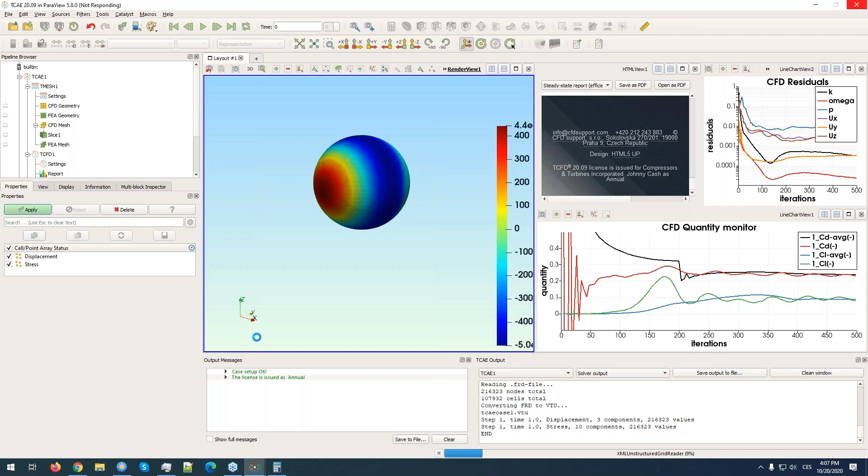There will be maybe a few seconds for the visualization of the FEA analysis. It's already done, so this is the FEA results, and we can visualize the displacement of the ball. For example, we can read what the displacement is at this position.

Here's a nice tool, you can pick any point interactively and read the coordinate displacement and other parameters, stresses, at that particular point.

There's also a nice tool to visualize the deformation. In the filters, alphabetical list, here's the warp by vector. I can click apply to really compare the displacement with the real one, or you can magnify it by some coefficient. So this was the original position, and this is the real position of the deformation if the scale factor is 1.

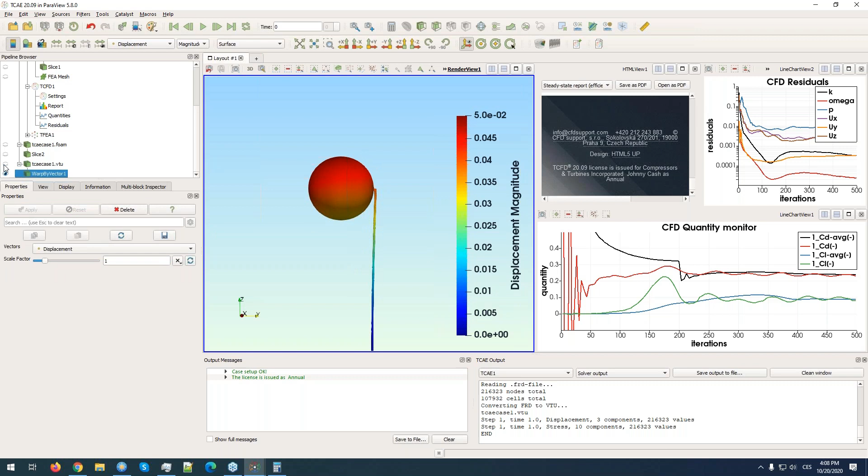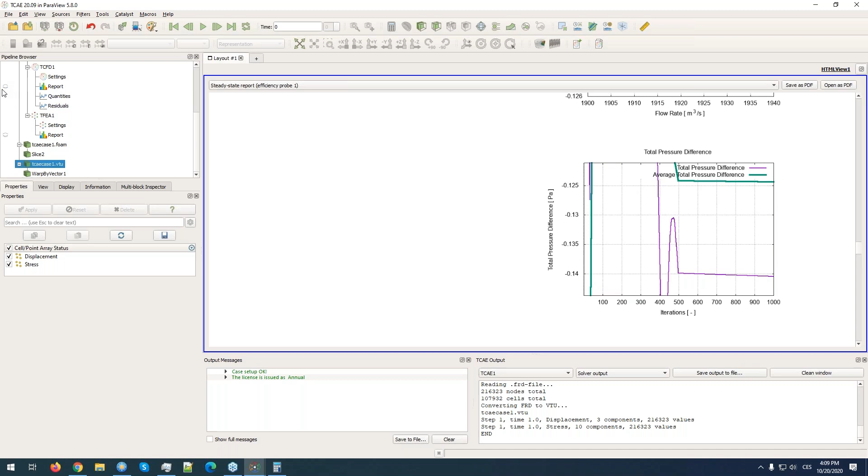Yes, and basically that's it. So for the final thing, let me show you the report for the FEA analysis. I can click here to visualize the report, and this is basically the FEA simulation report.

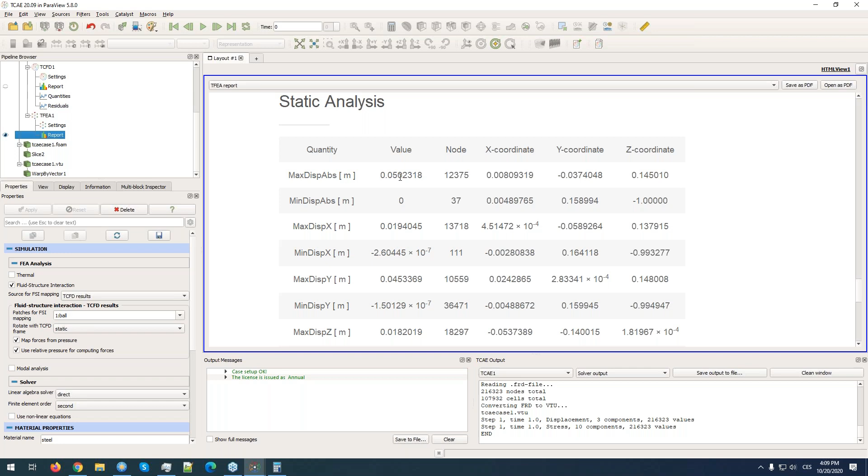Again, some parameters about the mesh, how long the FEA analysis took, and the static analysis results: the displacement, larger displacement, minimum, maximum, and so on, and some stresses. You can follow this data anytime because it's stored on disk, and you can anytime visualize the results, both CFD

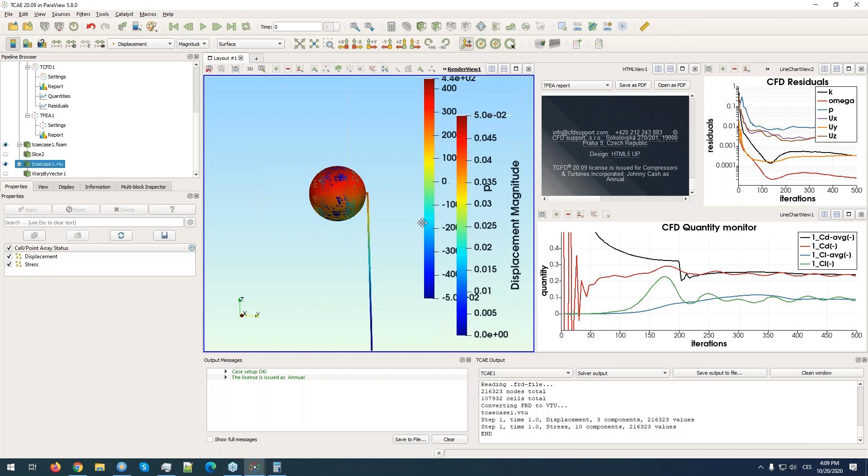Okay, so I think I've spoken for a long time, but I hope I've shown you the principles of working with TCAE. You can see that for simple cases and smaller meshes, you can work immediately and interactively. The work with TCAE is pretty simple and straightforward, so you just need to gain a little experience and you can immediately start your own project with TCAE.

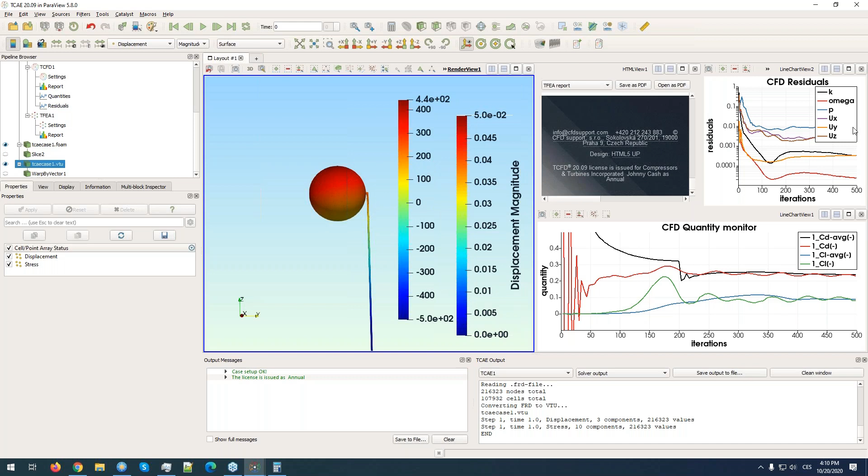Okay, I hope Lubos is still there. Lubos, are you there? Oh yes, Radek, thank you very much for an amazing, long presentation. No, it was great, and it was live, and you never know how it goes, so I especially valued that it was live. Thank you for it. And I was pretty lucky that everything worked well without any human error on my side. It's always difficult to set everything up from scratch, but it's perfect.

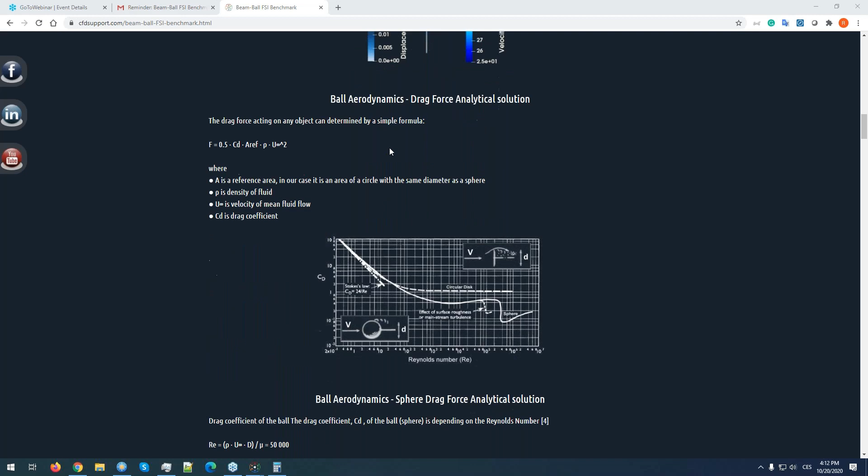Okay, the next question: can we do probe checks like in OpenFOAM? Yes, in the graphical interface of TCAE, you can do extensive post-processing presets and see them later in the results. So probes are possible for sure.